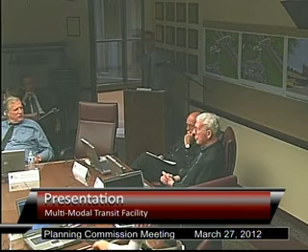I'd like to touch on introducing our project team that's with us here tonight and provide a few additional background points before moving into the exciting part, talking about the design concept renderings we have here before you tonight. I would be the project manager for all of the design and construction efforts that our consultant team will be involved in.

I have here with me tonight Wally Alex, who's our principal here at HRC. He works with the city on all of our projects with the city and would be involved in the overall oversight of all aspects of our work on the project. We have Jim Surhai here in the front row. He will be the project engineer for all of our civil and site work on the project.

Teaming with us for the architectural components of the project is Neumann/Smith Architecture. We have Mike Kirk, who's a principal with the firm. He will be overseeing all of the design on the architectural aspect of the building, as well as the site in general, and then providing the railway facility architect on the project too. Also with them here tonight from Neumann/Smith is Scott Bonney. He'll be the lead project architect for all of the day-to-day design efforts throughout the project.

We also have on our team Rich Hodek from Grissim Metz Andriese in the back. He will be the lead landscape architect for all of the site amenities and landscaping that will be included in the project. Also with us tonight, continuing the team effort, is the city's CMR. We have Alan Blower from Tools Clark team and Don Rogers from Tools Clark. They'll be working closely with the city and ourselves during the design and construction of the project throughout its duration.

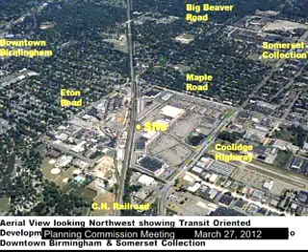Here's just an overview of the site in the context of the greater community, showing downtown Birmingham to the west, Somerset Collection to the east, the shopping mall directly to the east of the site, then showing it in context in its direct neighborhood with the approach drives on Doyle, its proximity to the shopping center, and the views across the tracks to the Birmingham side.

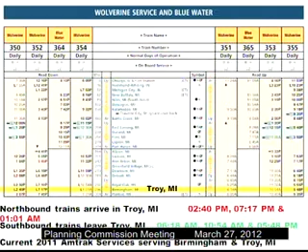We've also included a time schedule from the trains, because we note when the trains are both arriving and departing from Troy, as that information should inform our design process.

And once again, the 6 key ideas that we're going to review with you tonight: the articulation of the building facade, relative to the design you had when you initially approved it in 2010. Then the identifiable building entrance needed to be improved. We wanted to create a great sense of arrival. We wanted to introduce visual interest through key human scale elements, use the plaza, the area between, and then the building itself to create a transition from the building over to the platform on the other side of the rail, and finally incorporate cost-effective, sustainable design features where we can.

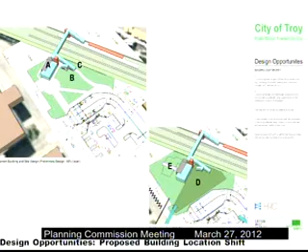The second diagram we showed talked about the fact that in the original layout, part of the support areas of the building, toilets, mechanical space, etc., where letter A shows up on that diagram, tended to block the views to the trains as they went south from the station. And where item B is on the diagram, the linear stairs that were developed at that point tended to obscure the views to the north. And then on the back side of the station at C and D, there were really rather open views to the loading dock area of the mall.

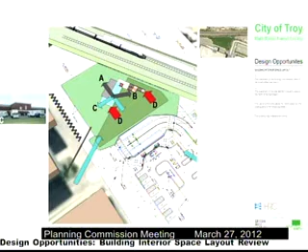So our hope was that we would change that orientation, and in the upper left, showing the 2B locations, get the waiting area so that you would get the long views north and south on the tracks, and where A is, use the support areas of the building to screen the views to the loading dock, and finally where C is, use this closer proximity of the building to the drop-off area to create a welcoming plaza and a very strong single identity for entrance.

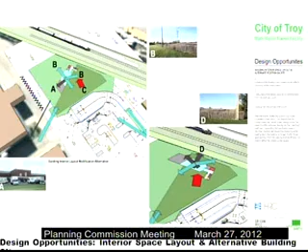That's illustrated there. In the lower right-hand corner, we did look briefly at making the station building parallel with the tracks, and what we concluded there was, because of the elevation of the rail above the surrounding topography, that if the waiting area was parallel with the tracks, you really wouldn't get views of the train because you'd be looking into the side of the ballasted area for the tracks.

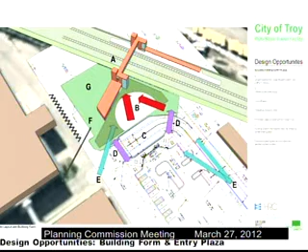So when you put all of these things together, we came up with our recommendation that the building be simplified, and would then have a bridge over the tracks to the platform. The approach area where item B is shown would have strong identity and establish a very pleasing, welcoming plaza. And where D is in the lower right, there would be safe travel for both bus patrons as well as people parking their cars to get across Doyle Drive, being able to look in both directions and go through the plaza to the station.

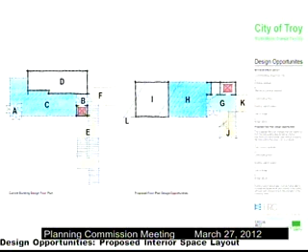So let me just take you through a few last items we had in our proposal. The top A through E are some of the buildings that we've done in the past couple of years where we try to create an iconic image for our clients. Some of them are traditional, some of them are modern. Project C there is in Birmingham.

We did a project for Livonia Parks and Rec where we have iconic elements that really make the building memorable. And we think Troy is filled with memorable buildings, and we want to make sure that this project is something that the city is proud of, that people realize there's someplace special when they arrive or depart from the city. G, H, and I there describe just a series of typologies for our architecture.

G is actually a traditional train station. A lot of these train stations are, in fact, very traditional in nature, and some of them, even new ones, pretend to be very old-fashioned kind of buildings. We're not sure that's the right solution for Troy.

H there describes the shopping center that this project is part of, and we thought that should inform the design, that there should be some continuity. We thought perhaps using similar brick colors would be one way to do that.

And I across the bottom are some very important buildings in Troy, from Somerset Mall all the way to your new high school, and some important towers. We think these are important, iconic buildings that we want to try to do when we create this facility.

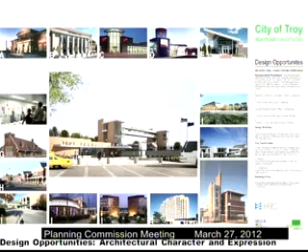So let me walk you through. This is one aerial that we've used. We've annotated it, and it's been kind of a popular drawing to understand it. Clearly, this isn't the way that anybody perceives the project except maybe the helicopter pilots, but it does help us understand a site plan and some of the vertical massing at the same time.

Clearly the bus drop-off on Doyle Drive is kind of a given. We didn't really have a chance to mess around with that. In fact, we simplified it. We're using the existing road now, and we're going to replace the pavement, but we're just going to widen it for a place for the buses to drop off.

We'll have 2 spaces for buses on each side and some form of a shelter that would be in the sidewalk area there. The existing parking lot to the north will remain essentially, and the southern portion of that would be a spot where taxi cabs could wait and queue up.

And then on the other side, of course, becomes the plaza to the main project. One of the most important things is the crossing of Doyle Drive. We looked carefully at the stuff that had gone before us and how pedestrians were intended to get from the parking to the plaza. And clearly there needs to be some demarcated areas.

One of the challenges, of course, is on a curve. You can't really just go straight as the crow flies across the sidewalk. You really want to make sure that you cross that walk in a way that you can see both ways, left and right, and pedestrians are visible from people turning that corner.

And then, of course, once you get to the plaza, keep in mind these are very early, and we're going to develop these and have much more interesting architectural statement than is shown here, but these are trying to show you all the components that we have included.

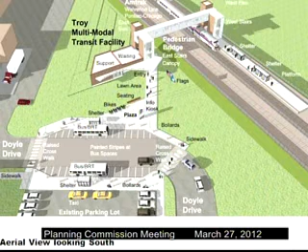As you can see, the way the thing is perpendicular to the tracks, it creates this sort of an extended bridge typology that really defines how you get to the station and over the tracks. And of course, the bridge element—let me go to the next one here. It's probably a little bigger to see.

The bridge element. Of course, we originally had pretty much an all-glass bridge in the design, and this suggests a much more modest horizontal strip of window, not unlike an Amtrak train, that might have a silver metal cladding with a strip of windows that would be sleek and elegant.

As you can see, we've proposed that there's windows on the ends of the bridge so that there would be an opportunity to overlook the shopping center and overlook parts of Birmingham when you pass through the bridge, as well as being able to look up and down the track.

And then a replica of the elevator and stair component on the Birmingham side. And then, of course, the platform. We originally had a linear platform that started at that stair and continued about 150 feet to the north. But based on the budget, we're suggesting that we would use some pre-engineered shelters that would be more economical. They would still have some heating elements, infrared heaters, that would keep people warm while they're waiting.

And we certainly wouldn't use this bus shelter. This is something that I had in SketchUp to drop in there. Something more elegant and glass, I think, would be an appropriate kind of response.

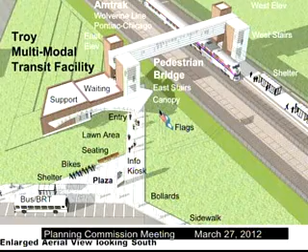So let me show you some more views. This is sort of a detailed view of the bridge mechanism. Again, one of the original ideas was to have this sort of the event of climbing the stairs or using the elevator. And we need to look at this closely.

Again, this was done quickly for the interview process, but we'll need to make sure that this is a very contained and safe building to operate.

On all these buildings, we always think it's very important to make these things very open to the outside. These are often going to be unoccupied, so somebody could be coming across that bridge at 1 o'clock in the morning. We want to make sure it's as open as possible and safe feeling. We want to really avoid places where people can hide.

With the budget as it stands right now, we're proposing that the station itself, the center, will be heated and cooled and fully conditioned space. But the bridge and the stairs, we believe, and the budget now reflects the idea of conditioning that space for ventilation, but not necessarily heating and cooling it, just keeping the snow out of it.

So once you're outside of the building, you would be in sort of a covered stair. I think probably the best example, the Ted Fuller building in Birmingham has a parking structure and a stair that's part of it. And that's just an open, enclosed stair. It's a very elegant way to get to multiple levels of that parking structure. We think that might be a good model to take a look at for how we might enclose the stair.

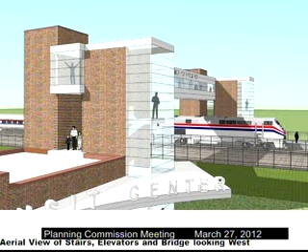And of course, the elevator has to be minimally heated to make sure the hydraulics work in the wintertime, but it's not going to be an air-conditioned kind of space. And then, of course, the bridge would require ventilation and fire safety equipment.

So let me keep going here. I'm kind of taking too long.

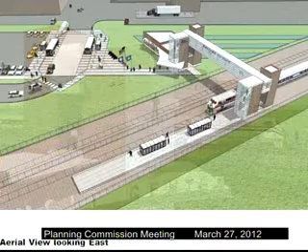So these are some aerial views traveling around. Here you are looking at the platform from the Birmingham side. And I think as we get into this, I'd like to propose moving the station maybe another 20 feet or so closer to the parking.

I think we still want to make sure that it's open when you come through the portal from the shopping center and open to the platform, so it becomes a graceful sort of embrace of the plaza, but I don't think it needs to be quite where we've shown it. We originally had the plaza there, and we just took the plaza out. We didn't move the building up. But this kind of shows you that relationship.

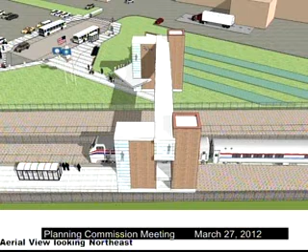And as I go directly over the bridge, you can kind of see how it stands now. Again, we think of these forms as being as sculptural as possible, sort of an artful object that's supported by the two masonry elements. Again, the masonry would likely match or be very close to that of the shopping center.

And then we would have some very clear glazing, silver metal, something that would be handsome, a lot like some of the materials that you might see at the Troy High School. Here it is looking north.

And again, this is the view that people would get coming into the city from, say, Chicago or from Dearborn. And again, we wanted to make sure that the elevators were very safe feeling, so we're proposing glass back elevators so that you would see those moving up and down to animate the building.

And then a window in the waiting room that would look at the southbound tracks. We found it's really important, what I think they call passenger anxiety, when you're sitting waiting for something and you can't see where it comes from. People want to know, is the train here? Is the bus here? And they're not going to sit there. They're going to go stand outside in the cold to watch for the train. So we want to make them comfortable and make this thing user-friendly wherever possible.

Then moving a little further, this is over the shopping center. You can kind of see that relationship. And again, the plaza for the bus area is relatively simple.

Obviously, there are talks in the work that this might become enhanced to become a BRT facility sometime in the future. That's down the road. Right now, we see it perfectly functional for buses and taxis. Bus rapid transit is something the city has been discussing now to opt for mass transit in the area, and I think it's something like 35 stations that would be connected by direct connected articulated buses. Whether or not that's going to happen, I don't know, but that could happen at this site.

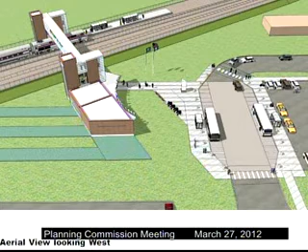There's space in that plaza that could accommodate that kind of modality. Is that dialogue being had with the bus, with SMART? I think right now it's someone's vision to replace the Woodward light rail, so I don't know how far along those discussions are. I saw it published, and it's actually a common way to provide transit in a more economical fashion because it uses wheeled buses. We're just saying that we can provide for it, there's space for it—we're not proposing that it's going to go in here. I've just seen it discussed that there's a potential for that, so this could be enhanced someday. This could be Troy's BRT station if that was the case.

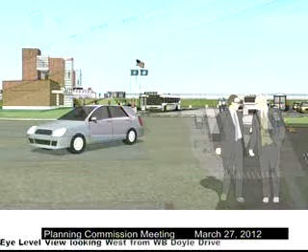Now I'm going to drop down to an eye level view. This would be if you're passing from the shopping center going westbound on Doyle, driving into the drop-off area or during that bend, so you can see the massing of the building. Again, a brick building with some glass elements to keep it open, trying to emphasize the vertical elements so it becomes beacons—a very inviting kind of look. We felt it was important to keep the building open for police that might drive by late at night and want to look in to make sure there's nobody fooling around in there.

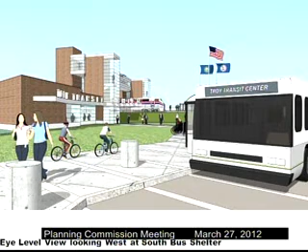The canopy is intended to provide a sheltering element. We had the plaza around the perimeter there, but I think it still creates a great way to have some signage—I've called it Troy Transit Center, though that may not be the correct name at this point. It gives you a feel for how that can become welcoming, and I think that really targets your request to have a memorable, human scale plaza. And of course, we would have some flags as part of the plaza as well.

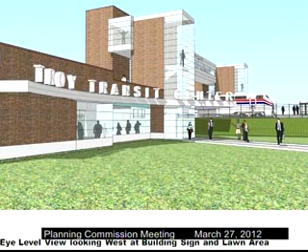So this is looking back at the bus area and the connection back to the shopping center. The sidewalks would be enlarged, and we would make sure pedestrians are protected from vehicles by using bollards to give a sense of safety along that way. We haven't shown any new pedestrian lighting yet—that's something we're going to have to take a look at, how we make sure the plazas are safe and the walks are properly lit.

Here we are looking at the entry into the building. Right where that woman is standing would likely be the location of the entrance. Under the 'E' in 'Center' would be where you'd enter the building at a single point, or maybe slightly to the left, and we would adjust the location of the plaza and the stair. You can see the grade there, how the train is actually quite a bit up in the air, so we want to make sure there's a vista from this waiting room to the tracks to the north and to the south.

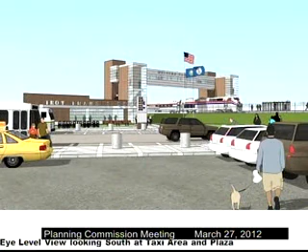Here we are back in the parking lot, looking at what it would be like to park your car and walk in there, bringing your dog to visit somebody in Chicago. So there you get a sense of it, and I think you can start to sense the way this becomes a real gateway to the city and to transit options away from the city.

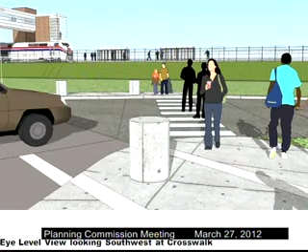This shows the sidewalk that already exists along the edge of the parking, and where we would have a walkway that goes across Doyle Drive at a 45-degree angle, which we think is important to reinforce for safety, to make sure people won't put themselves in harm's way trying to get to the place. As you get closer, walking across that, you'd be directed to look straight at the platforms where you'd be waiting outside, undercover, for the train, so certain things line up—these are cool elements that create an interesting vista walking across that way.

Turning again back to the plaza—signage is always very important in all of our projects, and especially for a building like this. One consideration we thought of would be to create a pylon in the plaza that could include signage elements telling people when the next train is arriving, when the next bus to Somerset Collection will be leaving, things like that that could inform the public.

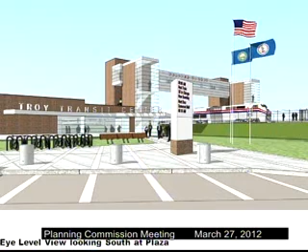So we need to develop this. We have to determine how much the budget will tolerate for things like this. That's going to be a challenge as we move forward on the design.

Of course, we're going to have places for bikes and benches in the plaza. We put something down here. It's not the most artful way to arrange bikes and benches, but we wanted to get something down. A lot of this was a device to make sure our estimators could take a look and have dollars assigned for these things, placeholders.

As you get closer, here was a notion of how to maybe do some interesting signage, which could be an iconic element to help direct people to the site on their trip. This is looking down southbound Doyle Drive. It's interesting because you almost line up perfectly with the bridge, so it becomes a giant goal post you're heading towards, which I think would be very dramatic as a terminated vista when you're driving down Doyle.

Here it is over on the Birmingham side again. You can get a sense for the platforms, and we need to look at the spacing. We reduced that to 200 feet based on an understanding with Amtrak that's probably going to be doable, and that saves quite a bit of money. Obviously that's going to be the most complicated place to build something, in that narrow zone between the tracks and Birmingham, so we want to make sure we do the essential amount over there.

The stair would connect you to the platform, and we'd want to keep that open. We'll have to carefully look at how we exit that stair and head to the platform itself. When you get out of the stair, there needs to be adequate room so you're not immediately walking too close to the tracks. With our experience in Dearborn, we know all the clearances mandated by distances from the track, zones of demarcation, textured surfaces, and things like that have to be applied as we move around.

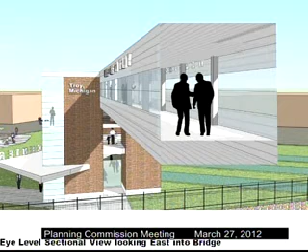This is kind of a section through that bridge if you're coming across the tracks, to get a sense for the scale. We need to look at this in terms of how we're going to support it, what structural elements will be required. Obviously it's going to be a long truss that's probably going to have some diagonal elements to triangulate the loads. But again, the hope is to keep at least a 4-foot section to give you some nice panoramic views. And then this would be the eye-level view if you're coming in from the train.

You can see we have to put a fence between the tracks so people don't exit and try to run to their car quickly. They have to use the bridge. It's a requirement—nobody gets to walk across the tracks.

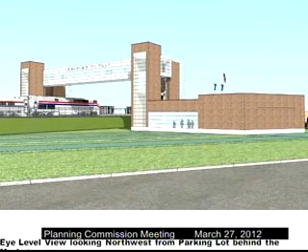This would be from behind the shopping center, showing that side of the building. Not a lot of the public would see this unless you're heading back from Home Depot with your wood chips. But here's the view, and obviously we'd have some windows on that side.

Again, we think the form should be simple. This needs to be an iconic structure, not a lot of traditional detail elements. We think the base wants to be a strong element so we don't have glass going down to the ground. So when they do mow the grass, they're not throwing grass clippings into the perimeter of the building. Things like that need to be looked at as we develop the design.

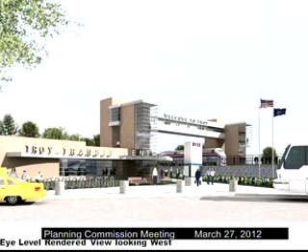This is just back to that front view, and then this goes to the renderings. We have an in-house renderer that can produce these things to give a little bit more textural quality, and you can kind of get a sense for some of the landscaping features, the bollards, and the plazas.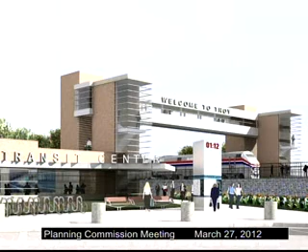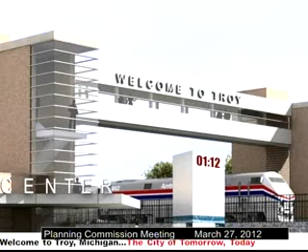As you get a little closer, you can see some of the ideas we have at this point on the glazing, which we need to take a look at to make sure we have an appropriate amount in for the budget, as well as a way to sign the building. We think this would be a great way to sign the entrance to the city with the Welcome to Troy sign. In fact, maybe we can even put 'City of Tomorrow Today' underneath that as a way to describe the entrance to the city.

So the last slide is, I think with this design, I'd like to ask your opinion. Do you think we have a starting shot at addressing some of your current concerns? We know that when you looked at the project before, the design was done hastily to get going on the project. We've had a little chance to study it, and we'd like your input on whether we're starting to take care of some of these concerns you've raised a while ago.

One little summary remark is, understand that this process we followed up to this date is quite an unusual one for a design project. We've actually shown you a very detailed representation of a design before the project started. So this design, we've attempted to meet all 6 criteria you're using, but one of the significant activities we still have to go through is with our other team member, the construction manager at risk. Once they have gone through and analyzed the project in detail for schedule, constructability impacts, and budget, we will then have to fine-tune what you see visually to make all of that work within the parameters in the council resolution. So things may change here and there, but the basic ideas are being represented.

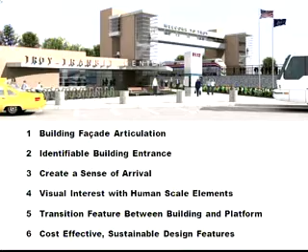Well, thank you for an excellent presentation. To respond, I'd like to have our resident architects lead us off, Mr. Tagle and Mr. Stratt. They've been working behind the scenes quite a bit on this project, and I think it would be helpful for all of us if we hear their comments first. Mr. Tagle, could you respond to that, please?

Sure. Well, I've looked at this project for a long time now, and I think you guys have done an excellent job from where we started some years ago, or a couple of years ago anyways. I think it speaks well to the quality of the city, and that it gives a nice introduction, a nice gateway to people coming in here. It's a modern statement, which I think is appropriate for what we're seeing developed in the city over the past few years, and I want to applaud you. You did a good job.

Thank you. Mr. Stratt, do you have anything to add? Yeah, I'd like to echo what John has just stated. I am very pleased with what I've seen so far, and I think it really is a night and day difference between what we originally were reviewing and what you're presenting to us now. You've satisfied an awful lot of the concerns that we have had. Safety is a very important factor, and the visualization of the transparency of seeing the inside is very important.

I would like to make a couple of comments, if I may. Please do. Suggestions as a possibility. I know that you have the waiting area that is being overseen, as illustrated in that photograph there. You can see from the bridge, you can see down on that waiting area, and I know initially you had grass, you had sod on top of the roof there. I think that'd be an excellent opportunity, at least the waiting area, if you could put something in that area as an alternate, if at all possible, if the budget would permit. Because it's an excellent opportunity to show that we are conscientious in terms of energy conservation, and that's one of the key things we've tried to do here at the Planning Commission.

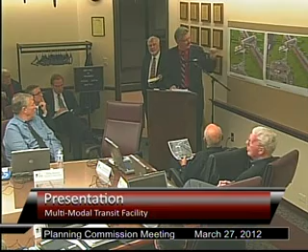I kind of envision we're probably going to want some sort of screen wall element for the mechanical. We have to really engineer what the equipment's going to be up there - it might all be in the room and won't be a problem. But you can make the mechanicals look like part of the sculpture. Right, you can make it work for you, not against you. Certainly, we'll take a look at those.

Is there anyone else? Mr. Shecky? Yes, you mentioned before that the lighting still had to be put in there.

That's the biggest concern I have, is lighting, because this is a very isolated area back here, especially on the Birmingham side, where the tracks are elevated, so you won't get a good view of people on the other side when you're at a lower elevation. So I think it's a very dangerous area over there. Lighting is important around the parking area where cars will be parking going up to the building, but I think the other side really has to be considered.

And instead of adding a lot more glass, could there be closed circuit cameras or something like that over there to protect those stairwells and the passageway across the tracks, so it can be monitored by the people inside, because I'm really concerned about safety.

Yeah, one thing - the Amtrak design standards actually help us with the platform itself. They require that for a period of time when the train's approaching, up until a period of time after it leaves, all the lighting on the platform and around the building has to double in luminance. So the normal basis for lighting might be what you'd see in a shopping center parking lot, and when anyone is actually on the platform waiting for the train, it's going to be double that until the train leaves. So it's actually going to be very bright in that area.

You're very isolated from help getting there if anything happened. I think we can do a lot of that economically from the canopy, and of course from the plaza itself, but we want to make sure that it's very safe.

When you say support, in other words, you're gonna have a ticketing area? Nowadays, when you get on an Amtrak train, you can get your ticket online, or buy it on the train, but there'll probably be a booth there where you can put your credit card in and get your ticket. So you're not gonna have physically people there? Just a machine, it's a little kiosk.

Okay, so then there wouldn't be anybody to monitor those cameras other than the police department anyway. Let's have Steve address it. Go up to the mic, Steve, so they can record you.

Even the kiosks—it remains to be seen whether Amtrak is going to want those or not. They do have them in some stations, but they're gradually transitioning over to get away from the kiosk and having more stations that rely entirely on purchasing your ticket online.

As far as the closed circuit cameras are concerned, as Mark stated, we would work with the police department to identify those areas where they would want to observe, and make sure that there aren't any areas that can't be seen from patrol where they would like to have visual observation from. So that is also part of the budget. The closed circuit cameras are part of the budget, and I don't know if it's detailed enough in the estimate that you have in your packet, but it is part of that budget.

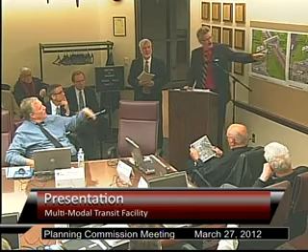I was curious about where those lines are, because I know there are high tension lines and towers in that area, and I just didn't know where they were. The tall stuff is over on this side, but there's buried stuff right here that we can't touch. That's why the building is set back. Let Mike address those ones.

As you mentioned, Scott, the high tension wires run parallel to the west side of the tracks here, and there are underground fiber optics along both sides of the tracks, as well as DTE overhead and AT&T overhead that run along here. Those overhead lines are scheduled to be relocated underground, and they'll follow the same pathway in their 10-foot easement, just into the city's property, but they would be underground.

Aren't there some towers too, Mike? Yeah, there's a tower that sits about right in this area, I believe, and another one down at the north end of the platform. Those are pretty tall, and they're about 40 feet square, sitting right next to the railroad right-of-way, just on the other side of our platform.

But you're saying the north tower is at the end of the platform as shown on that diagram? Yes, it sits somewhere right in that area. Now, they are talking about a new service to the old storage facility that sits right in this area. There were talks in our last discussions with ITC about them possibly changing the configuration of some of the towers in that area, and at the time they didn't have their full plans. I think they're going to create a substation on that triangular piece of the storage facility property.

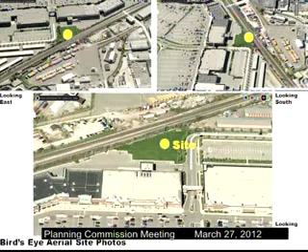And Mr. Chair, as we talk a little bit, I would like the team to really talk about the complexities of working in a railroad right-of-way and some of what those difficulties are, just so that you become aware of it, because it's pretty amazing the things that have to occur and how it actually raises the price and how much control the CN Railroad really has. Is there any other questions?

Go ahead, Mr. Johnson. We've got a lot of brick and mortar and concrete, and these buildings are pretty stark in appearance. Maybe you've got some landscaping plans, but if you haven't really considered that, I think we ought to consider softening the structure with some flowering shrubs, maybe some annuals, and some other kinds of greenery, which is going to soften the approach to this building.

To be honest, this was a diagram to help understand the components. It wasn't really intended to illustrate any landscape concepts. We're definitely going to take that into consideration.

We have money to install landscaping. We are proposing to use very limited irrigation or no irrigation on the project, so we have to be careful in terms of how much we can plant that requires a high level of irrigation. So I think we're going to work with Grissim Metz to really come up with a smart thing.

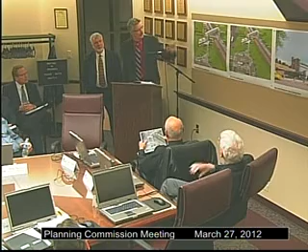This was one of the earlier ideas that talked about creating something simple, maybe some native grasses that would be an area that would create - when you're waiting in here, you could look out to the tracks and see some cool flowers and things like that growing naturally.

Obviously this side we see as a little bit more manicured, probably some shade trees and some elements of planters. And honestly, I didn't draw it. I think the renderings were a little bit more illustrative of the fact that there would be something going on.

We do need to take a close look at it. But you're right, it needs some softening. Right now it's just grass and buildings. It's not going to be just that.

Anything else? Mr. Krantz? I just want to thank you for attention to detail. I think you really consider the human in your design project here. The idea of sitting at a train station, being able to see the train coming, that's critically important to a lot of people.

And then other elements like the raised crosswalk. That's the first time I've seen that. That's phenomenal. That's what I'm saying. Raised crosswalk, both situations, so it's like a speed bump. Right, exactly. So it's like, wow, why don't we do that in a lot of other places where people cross.

Physically a car feels they're going up - oh wait a minute, what's happening here? This is a perfect element. I'm glad you've incorporated that. It's just super, again, attention to detail.

You've done a super job on that. And I like your signs too, and I like the word Troy Transit Center. Just my personal taste, I think I agree with you. That's simple, it's clean, it's right to the point. Multimodal. But I just want to congratulate you, it's a super job. I understand this is just really an elaborate schematic at this point. The planning and all those other elements that make it pop and really come alive will come in time. But structurally, this is super.

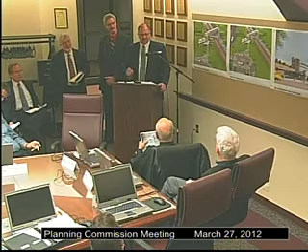That's certainly a tunable element too. We can do the best thing we can think of right now, and it can be adjusted at a later date depending on how the facility operates. Are the restrooms located close to that? They're right in this element right here, in this border. Yeah, they will provide the capability to close off the towers and bridge from the building, but then from a management standpoint, the city can decide how it will be open or closed.

Thank you. Mr. Sanzica? I would be remiss if I didn't ask about stormwater management.

Water management—I don't know if your landscape architect considered bioswales. I know you talked about native grasses, but I don't recall how stormwater runs across the site. Do they have plans for that? I believe the entire site is engineered to use the facilities in the front over on Coolidge. The parking area stormwater system is collected in an enclosed system that goes out to the retention basin, part of the shopping center facility. So this site is part of that overall stormwater management system.

We haven't done that detailed design yet, but as we work through it with Grissim Metz, we would certainly consider those options and make it a sustainable site. One feature that was taken out of the project as we reduced the budget was porous pavements and water reuse elements that we had to remove. But we still want to maintain a sustainable element and keep the site as green as possible.